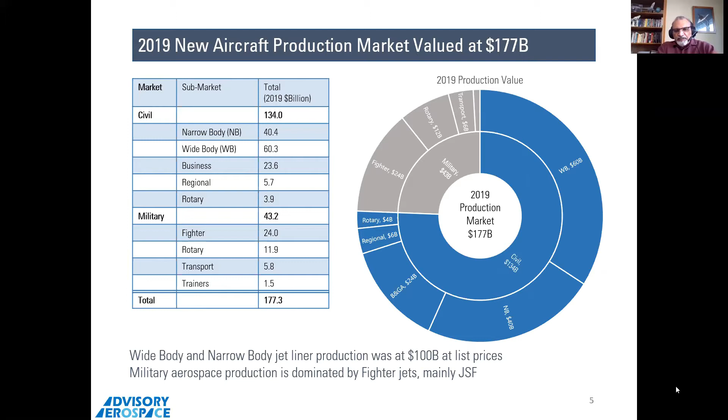And as I mentioned to you before, all the 5 revenue streams combined is over $500 billion. And some people say close to maybe even an 800 billion market. So that just tells you the size of the market and where we are situated in the supply chain. Some of you may be curious about, well, what is happening to the manufacturing side of the business as an impact from COVID? So we have done some projections. We have used data which assumes traffic recovery by the end of 2023.

Although recently, a few weeks ago, I saw that IATA has projected that recovery to pre-COVID levels is going to be early 2024, so it's even later. But the net outcome is that there is a $300 billion impact to the manufacturing business. So the dotted line was the pre-COVID projections of production values of aircraft. So these, by the way, are based on list values, which are usually highly inflated, right? So if Boeing says a 737 MAX sells for $75 million for whatever model, in reality, it goes for up to 40% discount. Okay, but these are based on list values.

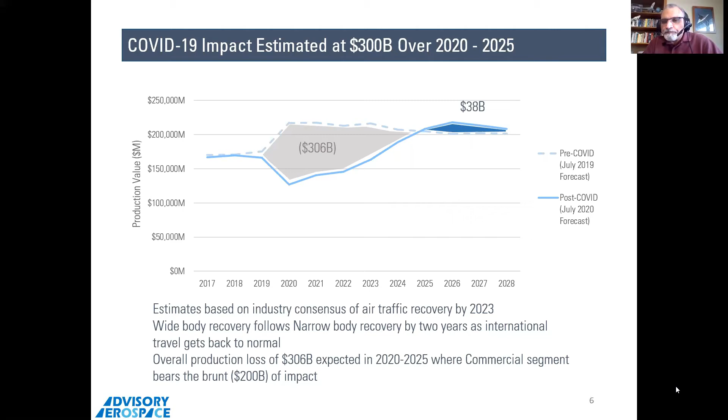So based on list values, there's a $300 billion impact in the next 5 years to the production side of the market. And that's huge. This is bigger than anything which has hit the aerospace industry before. And some of the other things I want to show is that on the commercial side, you can see the recovery occurring and getting to pre-COVID levels by, as I said, 2024, 25. But on the military side, it's actually going along fine with a minor blip. And the blip that happened in 2020 is not because of demand. It happened because of supply chain disruptions.

And finally, the last chart on the aerospace industry is, instead of dollars, you can look at material consumption also. So we have an aircraft material model where we can go system by system, whether it's landing gear or cabin or engine or wing, fuselage, empennage, and we can predict how much material is going to be consumed based on the delivery schedule. And so typically, right now it's about 1.5, 1.6 billion pounds of material consumed in making these aircraft. Bulk of it is aluminum.

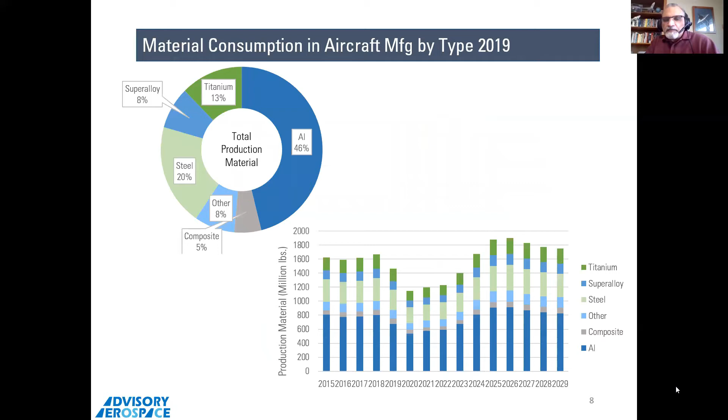And then you can see there's only 5% composite. Although the newer aircraft like the 787 and A350 are supposed to be almost 50% composite, their volumes are nowhere near all the other aircraft which are out there. So this just tells you, if you are in a material business, you're also seeing that drop and then coming back 2, 3, 4 years later. And it basically says that the commercial side of the business is overpowering the military side of the business. And as we saw before, the commercial side of the business is roughly 3 times the size of military anyway. So that's the reason why the commercial drop actually impacts everybody all the way to tier 4.

Okay, so we are closing the intro section on aerospace manufacturing and supply chain. Any questions at this point?

Okay, so we keep moving. What are the challenges? So why is technology so important? And by technology, I mean enabling technologies for operations.

So asset values are large. If you are assembling a Boeing 737 MAX in Boeing's Renton facility, where it is done today, it could tie up to $30 million in cash flow for Boeing. And if you don't deliver it because a fastener is delayed, a $10 part is delayed, it could delay a $30 million cash release for months. So having an efficient supply chain is that much more important because the asset values are so high.

So you can imagine right now, after the 737 MAX grounding after the 2 crashes, there are over 400 aircraft, brand new aircraft which have not been delivered, parked at Boeing. That is tying up close to $12 billion in cash for Boeing. So of course, Boeing is using that as collateral to get all the debt financing they're doing, right? Getting all the bonds and raising money for that.

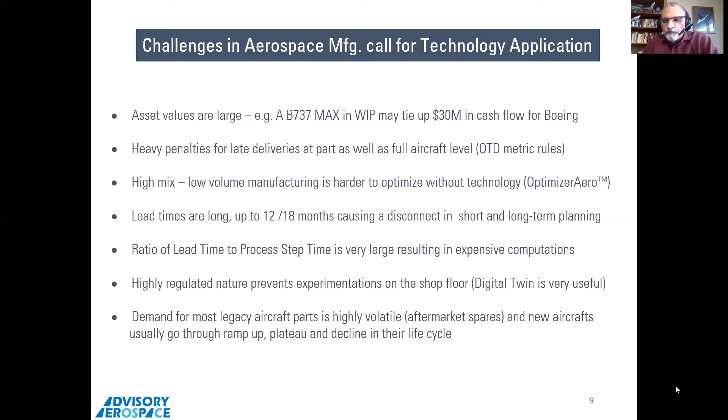All right, so that's pretty straightforward. Just pointing out why technology is important for aerospace manufacturing. So what are the pain points? There are pain points within the factory, and there are pain points in the supply chain. Today's discussion is about factory only. It's not about supply chain so much.

So let's just go over. One of the things we have done over the last 2 to 3 years is develop this suite of Industry 4.0 tools, which we call Affordable 4.0, because our target was these small manufacturers. So we wanted everything we do to be affordable for these small manufacturers. And in this technology suite, we have descriptive, predictive, and prescriptive tools to run your factory.

And what they do is essentially what's on the right side. So they will look at data, any data stream you have which is relevant to factory physics. It could be data coming from spreadsheets, Access databases. It could be your MRP system, ERP system, PLM system for bill of material, any factory data if you've implemented IoT coming directly. And it converts it into a standard schema, which we call our standard digital factory model. So whatever data a client has, we convert it into a standard factory model, and then we apply analytics to it.

So the analytics could be an optimization, it could be a simulation, it could be predictive delivery against demand, capacity analysis in the long run, whatever the client needs. All those different tools come into play, and then we give a very visual, easy to use user interface. So everybody from the shop floor to the CEO of the company has what they need and no more or no less. And it's something that they can understand and something they need to make their day-to-day decisions.

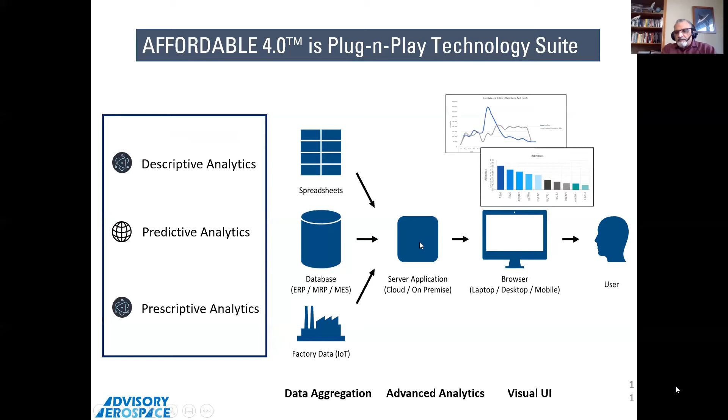But I have gone to clients who don't have an ERP system. They may have some version of an old MRP system or some Excel sheets. So whatever you have, we just take it, convert it into a standard factory model format, and then we can do any of these things to it.

So one more question for the predictive part. It seems like in order to make this, you also need a demand forecasting model. Yeah. So is that something that your company comes up with, or? No, so I think in aerospace, unlike consumer goods, there are much better ways to forecast because the long lead times actually force people in Boeing and Airbus to give long-term forecasts. If you actually look at the Boeing website, they'll tell you what the expected deliveries are for the next 18 months.

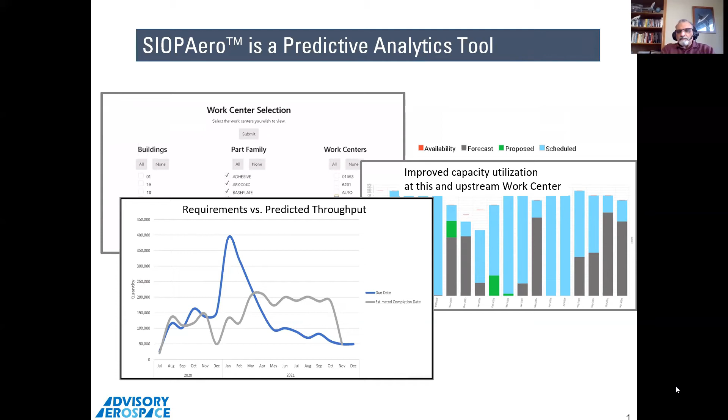Another, as I mentioned, to build a digital twin, we can do stochastic simulation. I understand Alex is teaching a class on simulation at this time, so some of the students listening to this may find it very familiar because we use Simio also. Using Simio, we can do discrete event simulation; using that technique, we can simulate a factory.

To give you a benchmark, we can do a factory with 200, 250 people, 50 pieces of equipment, maybe 20, 30 process steps, maybe 100 different types of parts. We have done simulation in less than 2 months and given them results.

In this case, we did the simulation of a factory in Tulsa, Oklahoma, where they were making flaps and slats for Boeing 737 wingtips. They were generally running some of these parts at a very large batch size because the setup times were long. So their initial inclination was, well, if the setup times are so long, we need to run larger batches for some of the machines, right?

But when you look at the overall simulation and you look at every step and how things are outsourced and how things are deburred manually and inspected, we found that a batch size of 10 was much better, and that immediately reduced their lead time from 5-6 days to a day and a half. And that helps you also free up cash because you have less inventory on the shop floor.

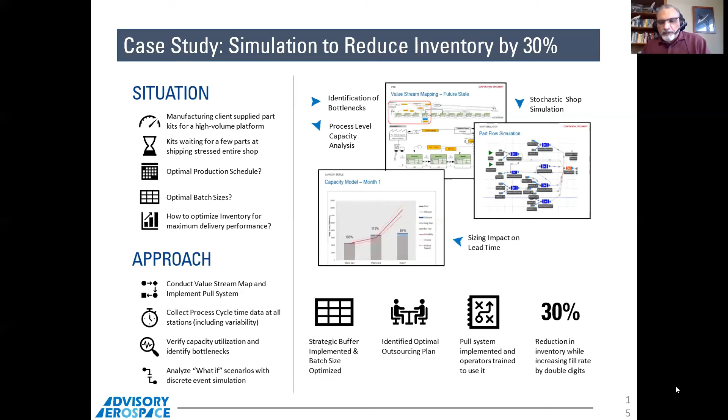Okay, so let's go to the next tool, which is OptimizerAero. Here we optimize; again, the input is all those data streams we talked about: bill of material, what is in the inventory in the stock, part routings, process times, setup times, purchase part lead times, demand schedule. Dispatch just means what is the current state of the parts on the shop floor.

And then you input it to this tool, which has a very good user interface. So you can pick what shift structure you have. You may have 2 shifts, 8 hours each. You may have 3 shifts. You may have 2 shifts during weekdays, 3 shifts during weekends. Whatever your shift structure is, you can input here.

And then you can put the other things I was talking to you about, people on vacation, a machine down for some reason. You can put all that information, and it will give you what the optimized schedule is and what the result is.

So in this case, we were working with a factory where you can see going from roughly 40% on-time delivery to close to 100% on-time delivery only took 4 or 5 periods, which is roughly 1.5 times the lead time in that shop floor on that factory for that part. So very, very quickly, you can get to close to 100% theoretical delivery times.

And there are other things you can plot, like how the overdues are going down, and it's all consistent. And you can also see how your equipment is being utilized. In this case, you see the top 2 equipments are almost 100% utilized, the rest are not. So if you want to increase the throughput, you probably need to do something about the first 2 processes, which are becoming bottlenecks, right?

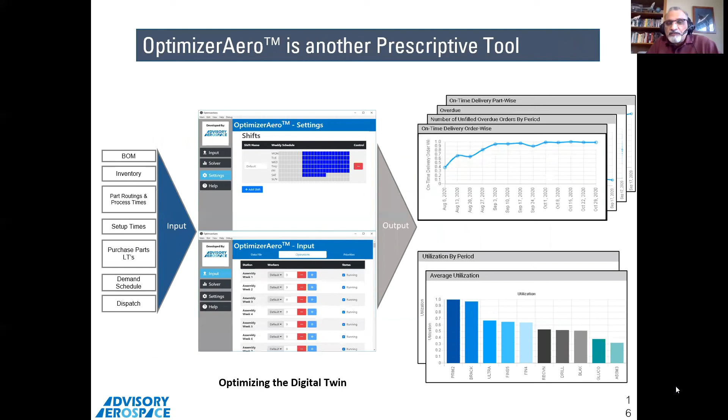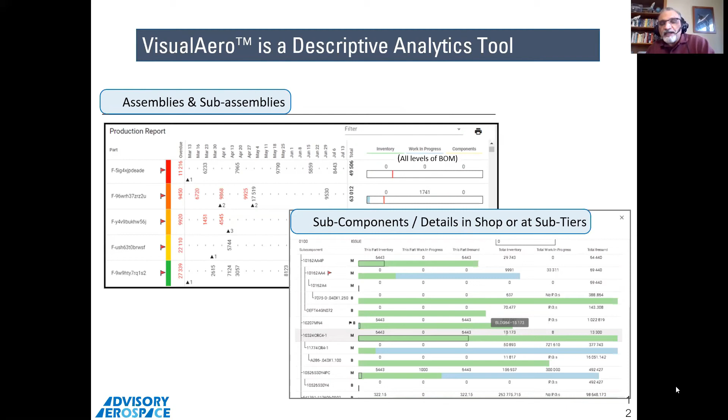I have come across simple machine shops making 25% margin. There's no apparent reason, no differentiated technology, no secret sauce, but they can because it's just lack of transparency. That's the reason why Boeing likes this tool: even though it doesn't go into the cost, at least it tells you the real-time movement of your part at a supplier. And suppliers should have no objection sharing this information because it has no cost information. It doesn't even have process times. So it's not sharing anything other than what Boeing needs to know anyway. It's a long answer to your question.

So maybe as a follow-up, do you see a lot of vertical integration? Because if the relationship is sticky anyway, would you want to pull that into the business? Yeah, so the customer can think about a vertical integration strategy, but the more integrated you get, it's actually very bad in the downturns, right?

Because your overhead structure goes out of control. So you only want to vertically integrate, if you're smart about it, when you want to acquire some technology that you don't have, or if these are parts which are so critical that you have only one source, and you want to control that capacity, so that supplier is not playing Airbus against you if you are Boeing. Right, so there are other business and technological reasons why you want to vertically integrate, but just in general, these small shops usually don't have a secret sauce.

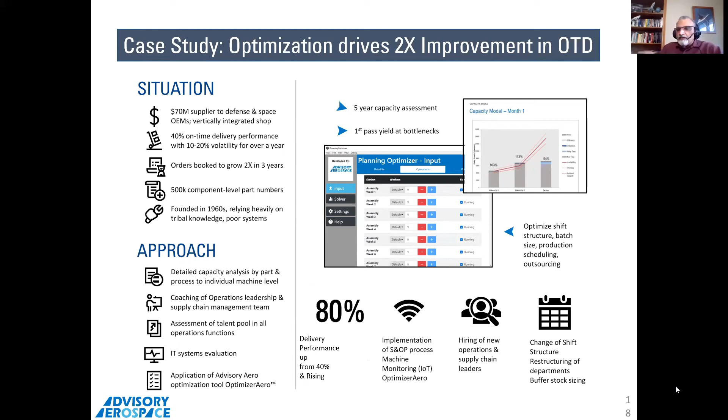Okay. Some of them become very good at producing because they have done it for a long time. Or they may have adapted their tools or equipment to do certain things, which comes by doing something over a period of time. So there's a learning curve for sure. And if you bring in a new supplier, it'll take that much longer again to get to that learning curve. Okay, thank you. Yeah.

Okay, and then finally, what we as a consulting firm are thinking and what we are seeing in aerospace manufacturing is that especially small and medium-sized suppliers are very cost sensitive. They want to see that the implementation lead times and costs go down. And that is the reason why ERP system companies like SAP are not getting the penetration they were expecting in the tier 2s, 3s, and 4s of aerospace.

So now, as a result, you have all these smaller companies that have come up like Infor and Epicor, two of them actually in Minneapolis, that make their own ERP systems, which are kind of like SAP Lite, or even lighter. But even then, it takes a year plus of implementation, up to $1 million in investment to implement it. So we know that's the pain point.

So what we're saying is, hey, you don't necessarily need this latest ERP system, which has all these bells and whistles. What you really need to do is use your data stream to make your shop more operational, and we can give it to you by this simple tool that we have developed. And that can be implemented in a few weeks' time at a fraction of the cost. Of course, it doesn't do everything an ERP system would do, but in some cases it actually does more than what an ERP system would do. So it's a choice our clients are making, whether they go for an ERP upgrade or a new ERP system, or they look at these targeted technology solutions.